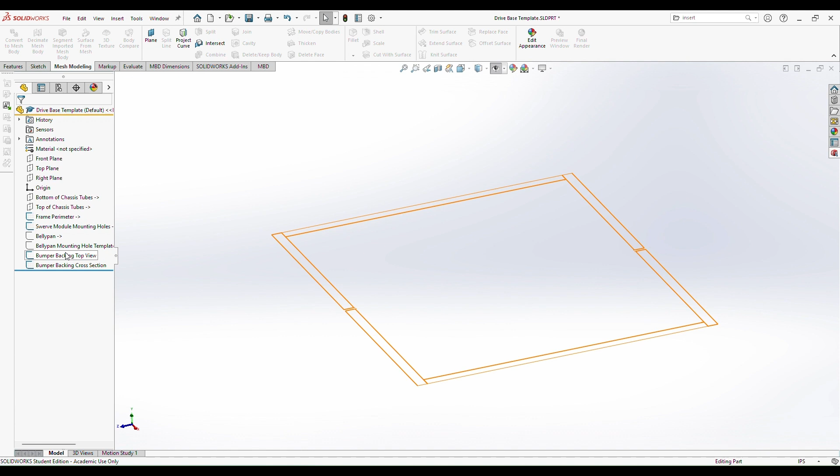We have some visibility, there we go. Instead of doing the top view, we're actually going to do the front view first, or the cross section. So we go right plane and make a sketch.

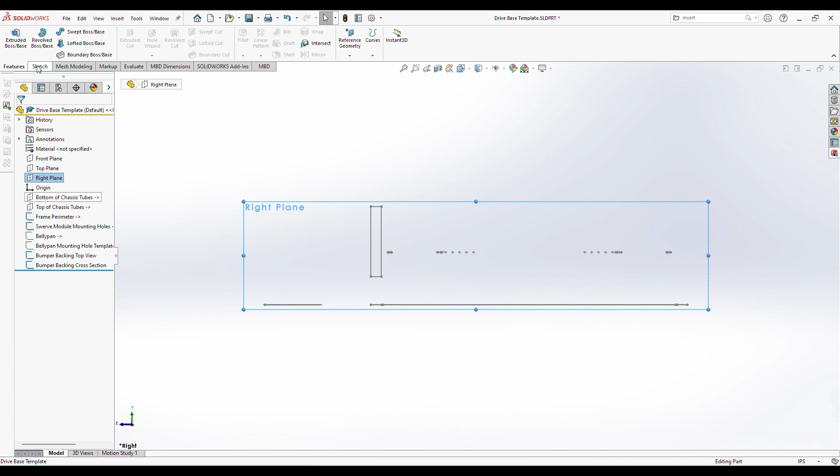The beginning of the soft parts is going to be our pool noodles. So we've got two circles to represent that. We're going to make these equal in size, tangent to each other, and vertical above each other. So now this moves around. We also know that the pool noodles are about 2.5 inches in diameter, but again, that's a parameter we can tune.

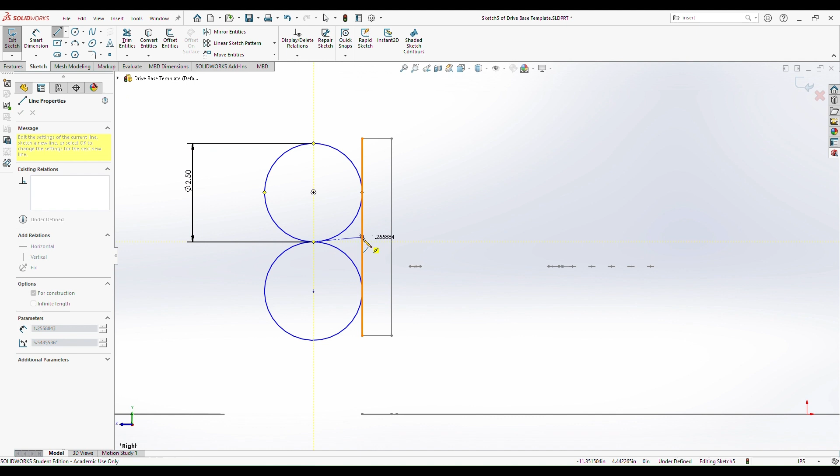So now we need to stick these to this bumper backing. Tangent that there, and we want to get it about even with the center line. We'll go from this midpoint here to this point here and just make that horizontal. So that'll put us in the right place.

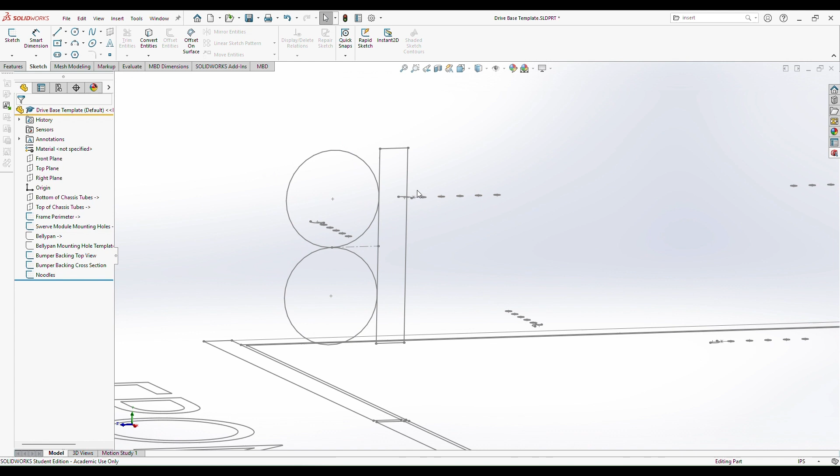All right, so that's our noodles. Just call that noodles. And we could extrude that. You could either go in and make it a solid, or extrude it all the way around this way. But that's kind of a pain to do because you have to copy the sketch like 3 or 4 times in order to do that.

So I'm going to skip the noodles because we can't see them anyway. Instead, I'm going to do the fabric that goes around the outside. And we'll start with just

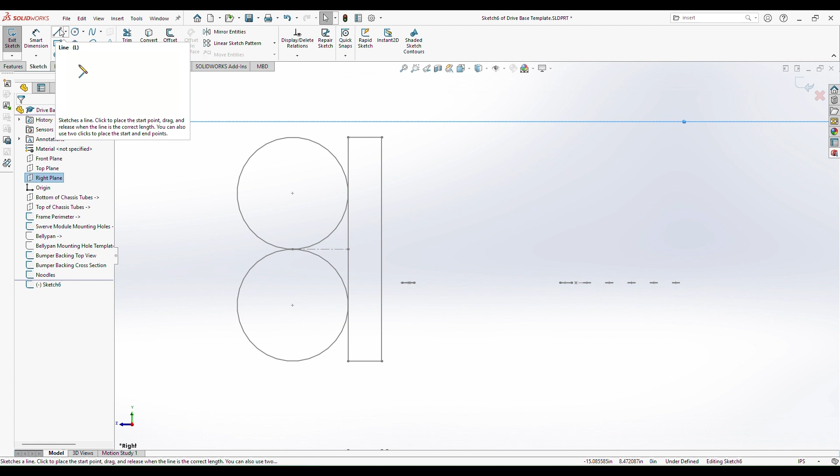A sketch on the right plane where we bring in - actually we don't need to bring this in. We'll bring in these, we'll convert entities, and then we can connect this to here, this to here, this to here. And again, I'm going over the plywood because we're going to make this the fabric.

The fabric's going to extend over the plywood. We could have a gap in the back, but I'm not going to model that right now. I'm just going to model it as though it's contiguous.

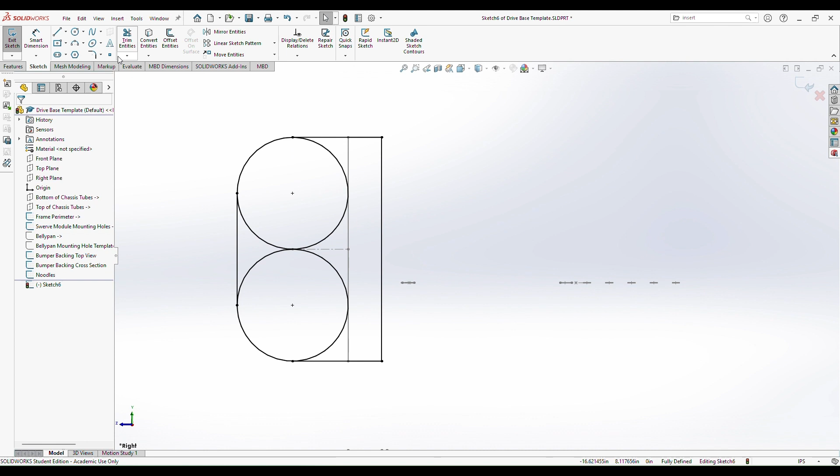And this is one of the very few times when I will say it is good to use the trim tool. We converted this from another sketch, so there's no way that we're going to break the geometry when we do this, because it knows where it's from.

Cut this, cut this. So I'm using the power trim, so when you drag a line through something - let me undo and we'll show that again.

So trim entities: you drag a line, and when you cross over another line, it trims it to its 2 nearest neighbors, so it trimmed it to here and there. Same thing again, I'll trim this one. And again, nothing happens to the geometry because this is coming from that noodle sketch.

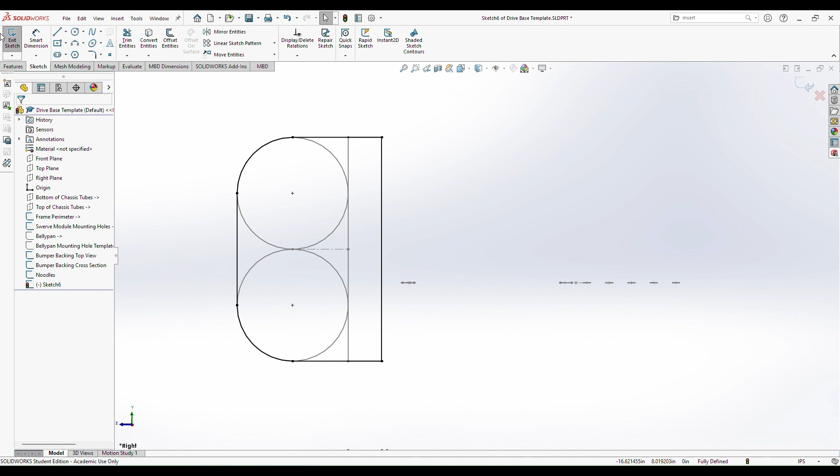Anyway, so that's what we got here. Let's call this the fabric.

And we could leave it there. Let me edit this, show you this. You could leave it there, but we can also do an offset just to show what the fabric actually looks like.

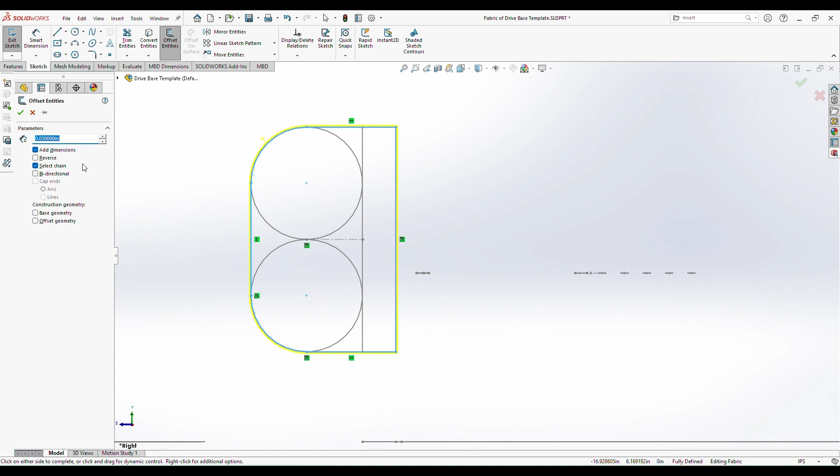So I'm going to do this, 30 thousandths of an inch - 0.03 is about what that fabric measures, I believe. So now we can see it in there. All right, so this is going to be the fabric cross section, but we need to make a fabric top view now.

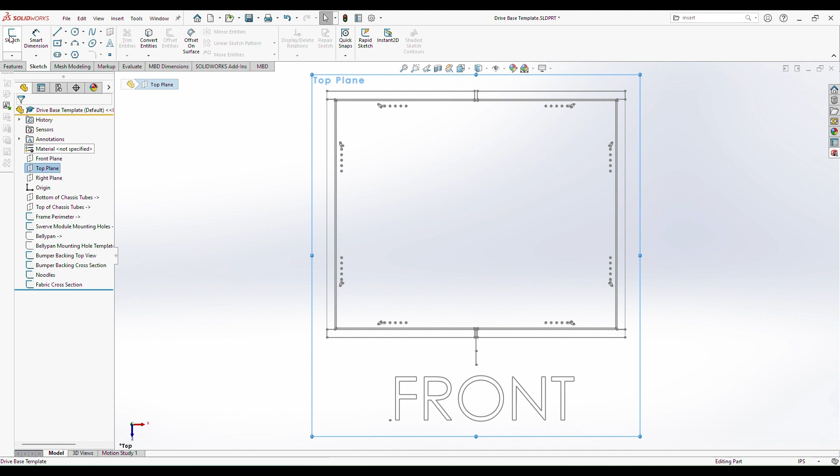So we'll go on the top plane, we'll make a sketch. And we're actually going to make it the same way as we had before, just that sort of inverted. So we'll go around on the outside here.

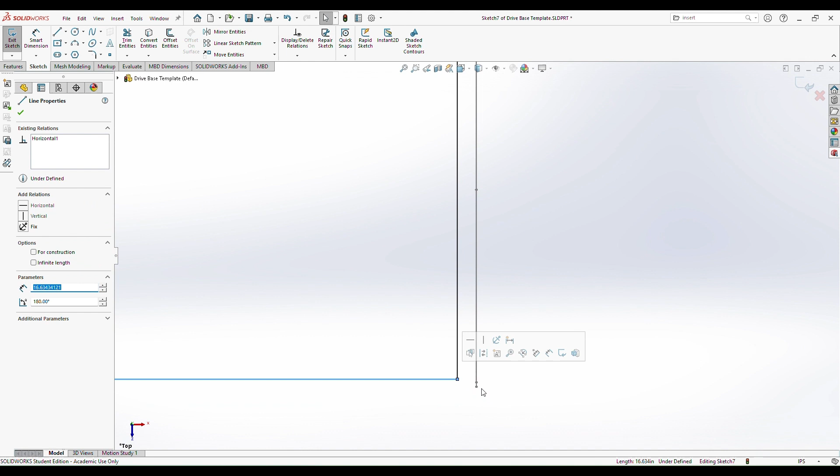We're not going to bother with that 30 thou offset just yet. This line here and this line here. Oh, probably be this point here. Nope. This line here and this point here.

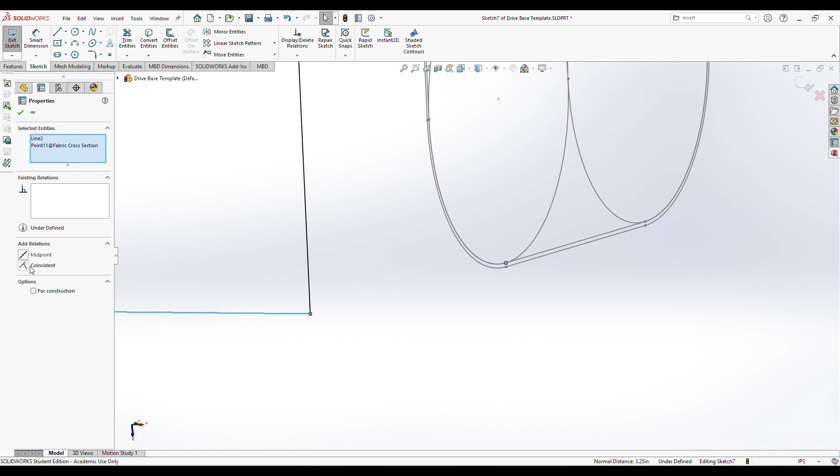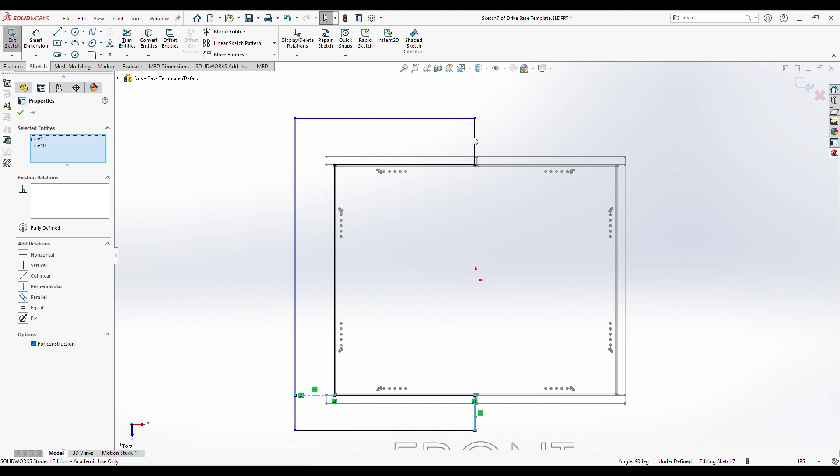There we go, make that coincident. So that sets our distance out. And for the rest of these, we can just center line across here. We got this line is equal to this line is equal to this line. Equal - that makes half of the bumper. So I'm going to do the same thing on the other side.

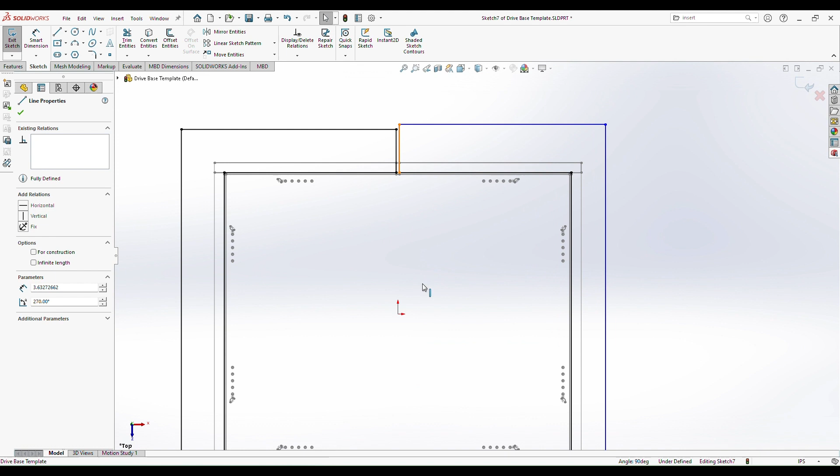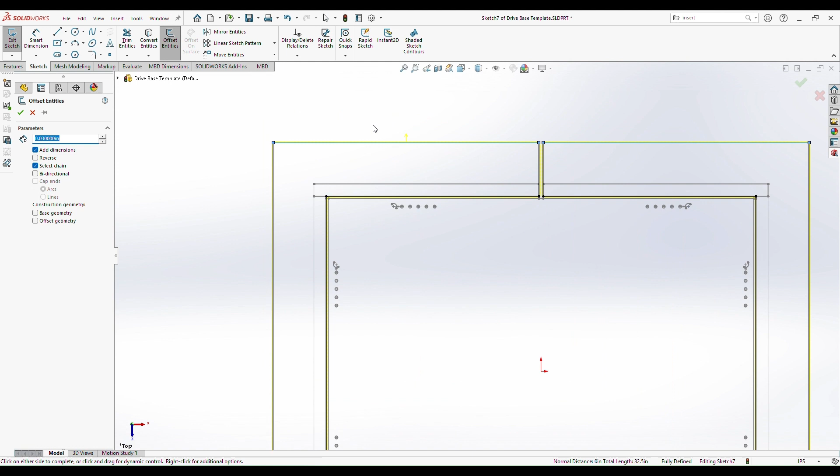And then just for kicks so we can see it, I'm going to offset this. You can see we're offsetting this outward, but I'm going to make that construction geometry. The offset geometry will be construction.

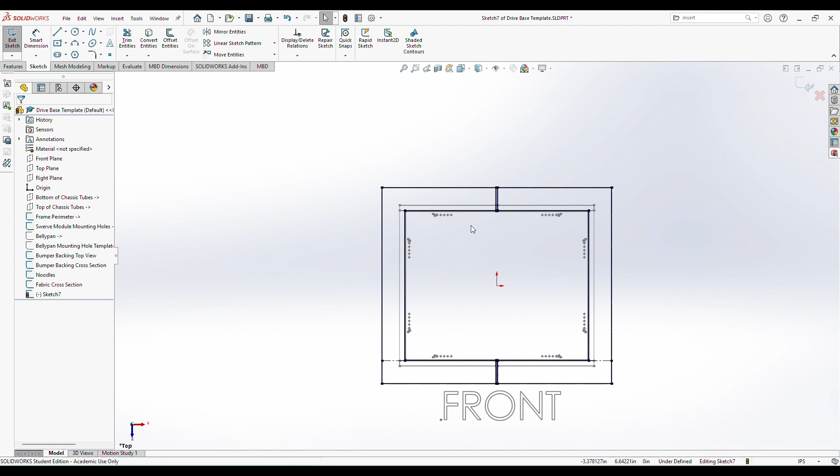So you'll note that this won't update with the other thing, but if we delete this dimension here, now you can move these. You can set them to any size you want. And then if you do that, you can pick this up and make that coincident so it'll update with this other sketch.

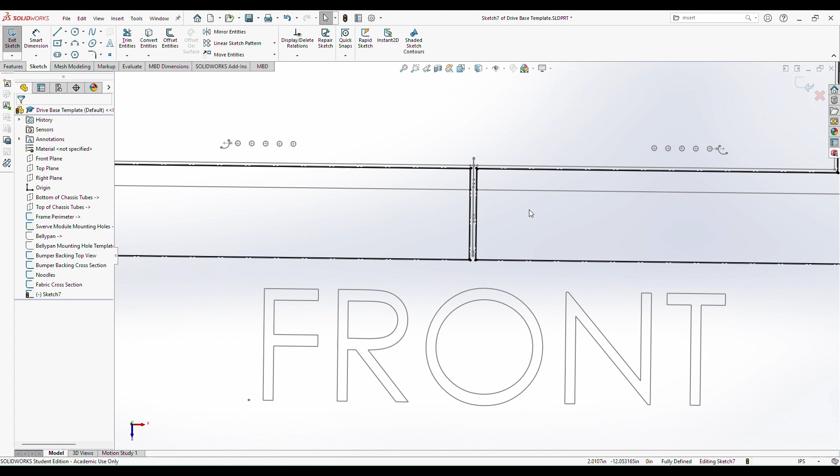So that's our sort of bumper elevation here. Or not bumper elevation, bumper top view. Bumper fabric top view.

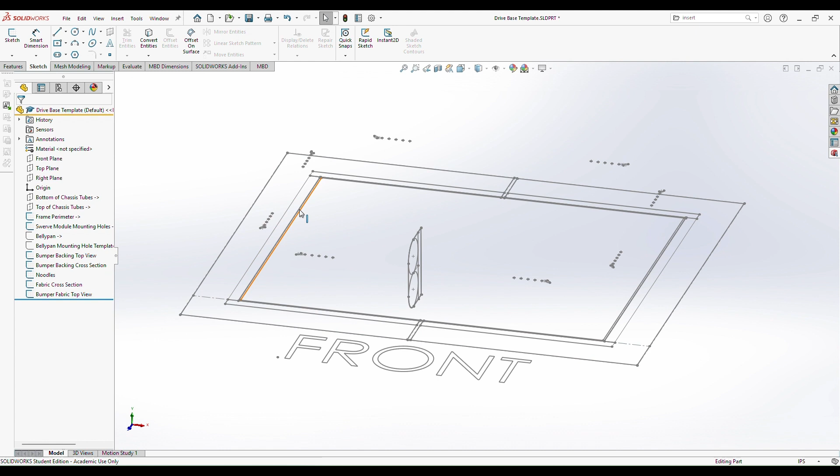And just like the bumper backing, we're going to extrude it. It's only going to be 2 pieces instead of the 6 of the bumper backing because we don't care about separating these out.

So let's do it. We'll make a new file, new part. In the new part, we will insert our template part again. We need to make sure unabsorbed sketches and planes are in there. We probably don't even need planes. Of our sketches, these 2 are the important ones.

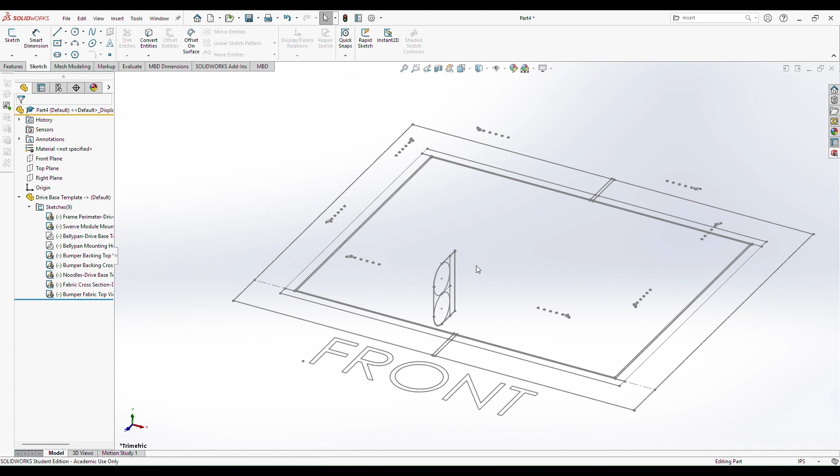So we're going to start with this one, and we're going to extrude. The same way that we did before, we'll pick this as our starting vertex down here, and we will pick up to vertex, and we'll pick this one. I picked the inner ones for both of these, and you'll see why in a bit.

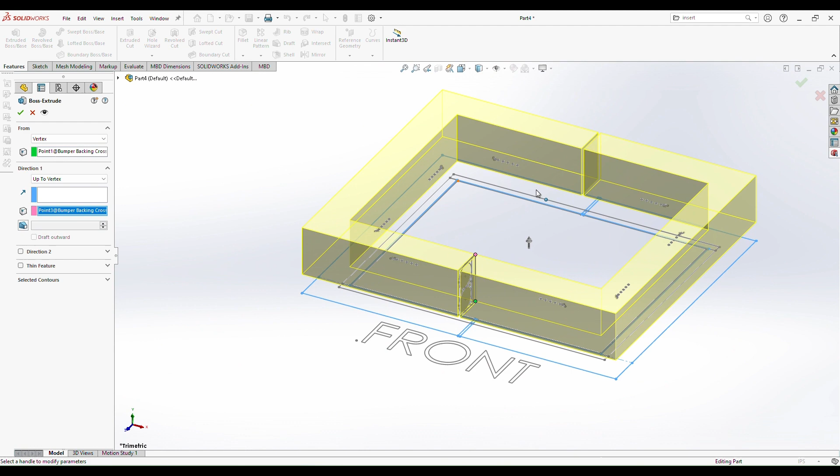So we got it. It's going to give us 2 bodies, 1 body, 2 body. And that's good. So our next step on this is we want to fillet these.

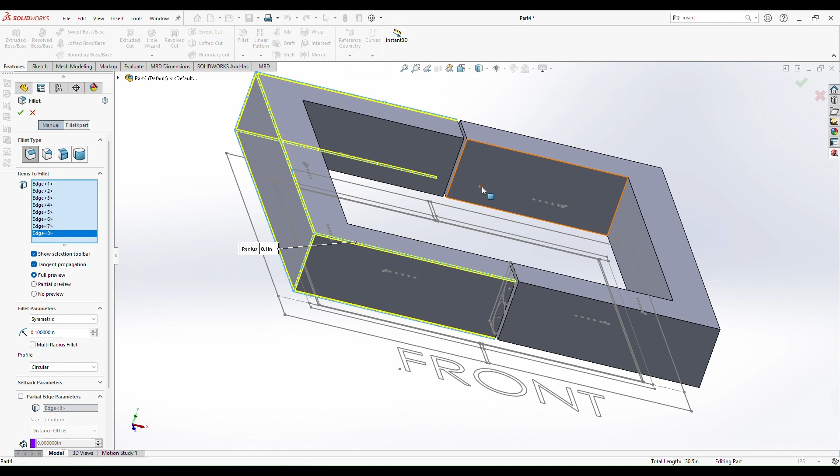So we'll come around and hit each of these edges. You can fillet right through a face if it knows what you're looking for. Oop, missed one. See? Right there. Oh yeah, it's only going to let us fillet 1 body at a time.

That makes sense. And for our radius, it's going to be half of what the bumpers were. There are ways to link this, I'm not going to get into that right this second. 1.25.

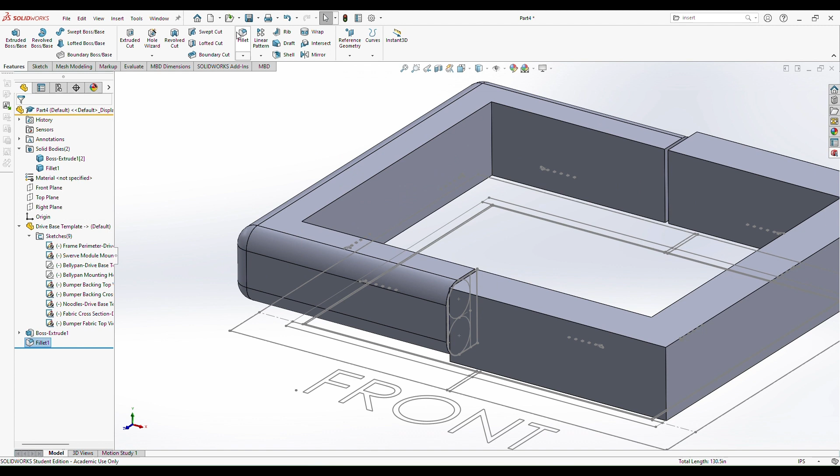We will do a second fillet feature where we will hit all of the radii, all the outer radii on this other body.

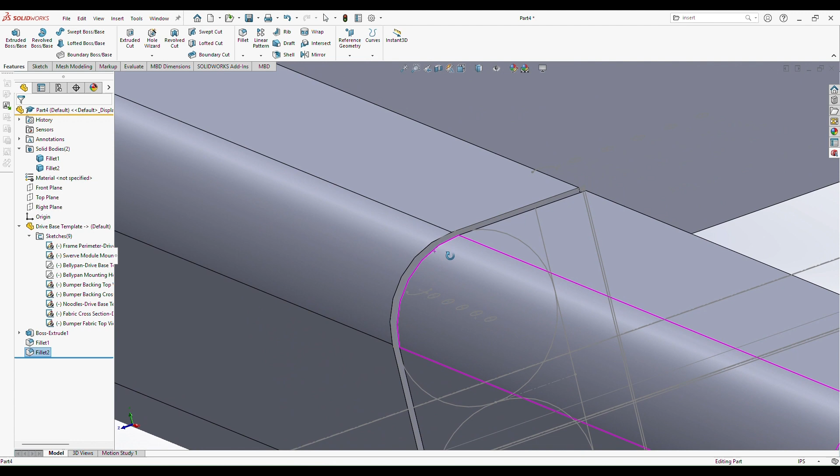Okay, so this is not the size of the fabric, right? Because we added that additional 0.03 inches. But that's where we can do something really clever.

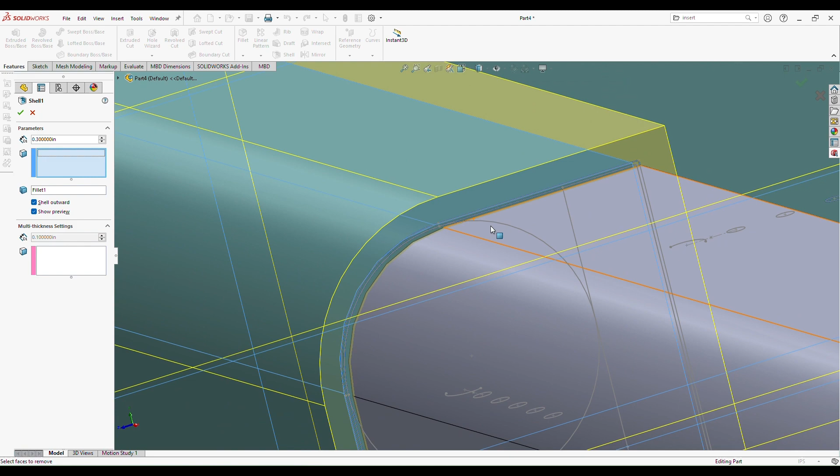Click on one of these bodies and click shell. And we're going to shell this outward by 0.03 inches. You'll see, let me exaggerate this for a moment. We go to 0.3 - that it sort of bulks up the entire part. If you look at the side view, you'll see that it's getting bigger. If you go down to 0.03 like it's supposed to be, there you go.

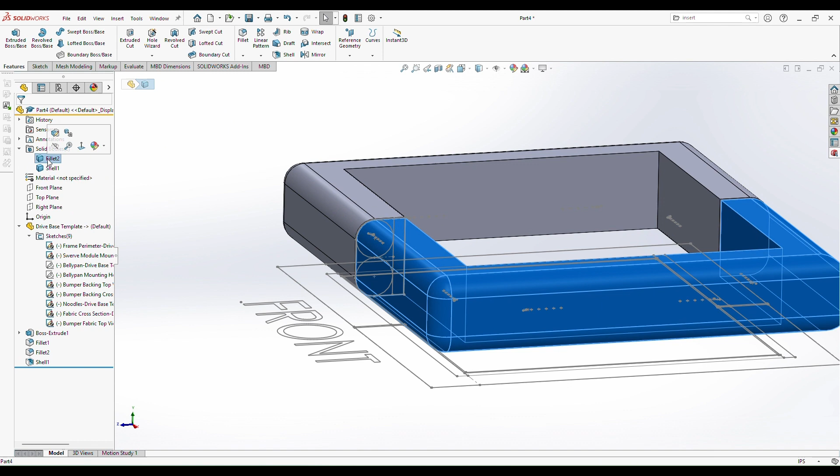And we will do the same thing on this other one. We will shell that part outward, 0.03, show preview. Looks right.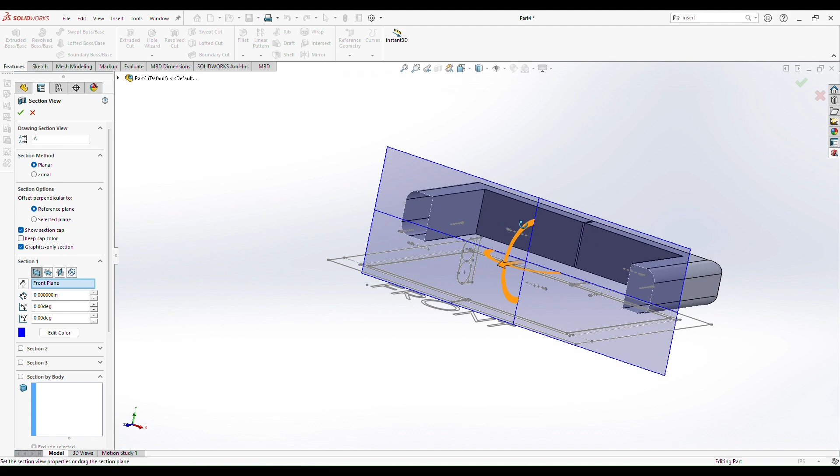The other thing about this is if you do a section view, you'll see that this is actually hollow. So if I go to the front plane, for instance, and I do a section view - that's this button up here - you can see inside. So it is just that 0.03 inch thick shell.

Now we've got our bumper, sort of our bumper soft part perimeter. We can save this. Bumper soft parts.

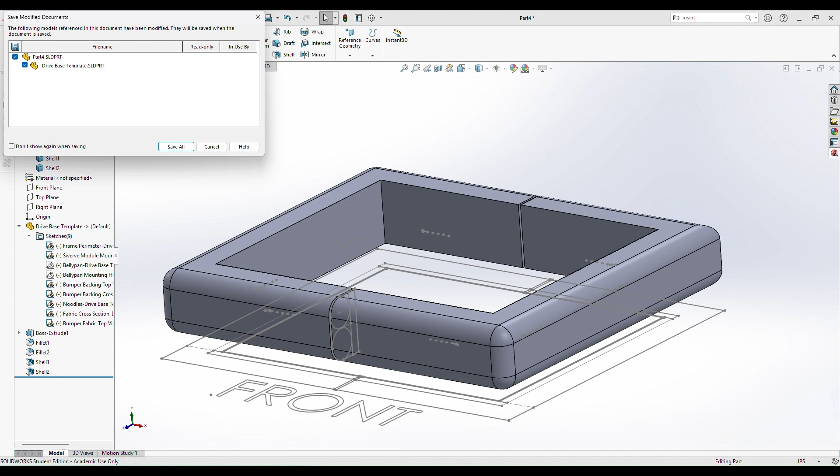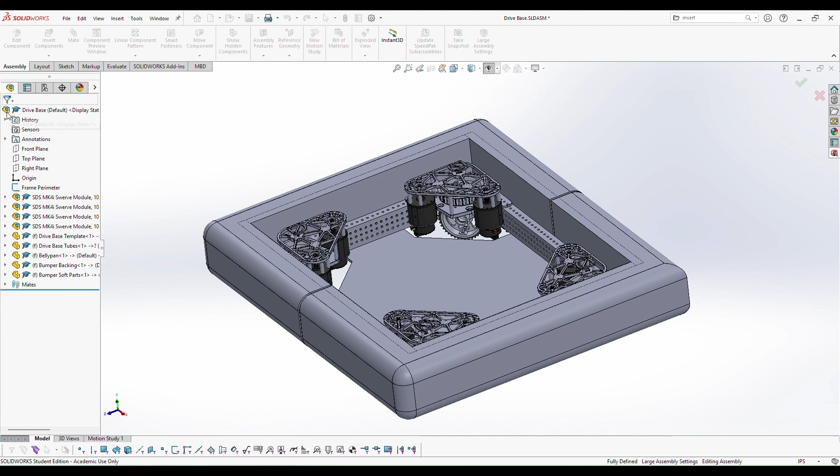And we can go into the drive base, just like before. Insert bumper soft parts. There we go. Just regular shaded.

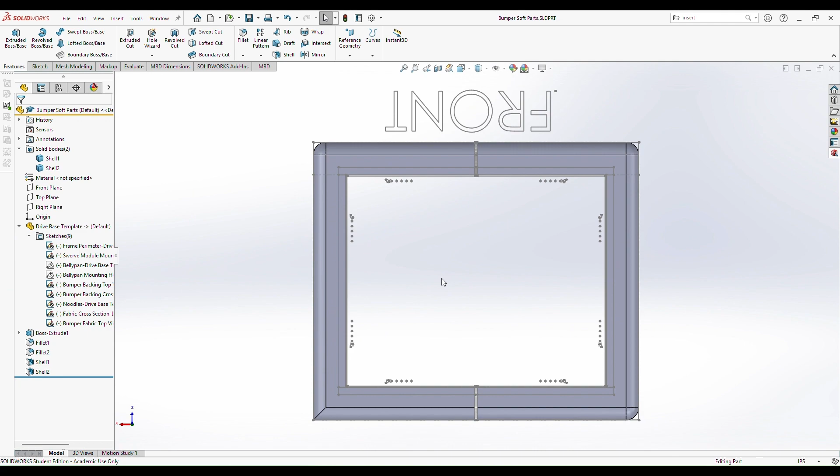And there you go. And if you go back into bumper soft parts, one of the things that's interesting to note is that just like on actual bumpers, you add thickness to the side of the bumper as well. So that's why it's important to make this gap not close all the way up. So we add thickness there, we add thickness to the back here, so we start to fill this gap between the frame perimeter and the bumpers.

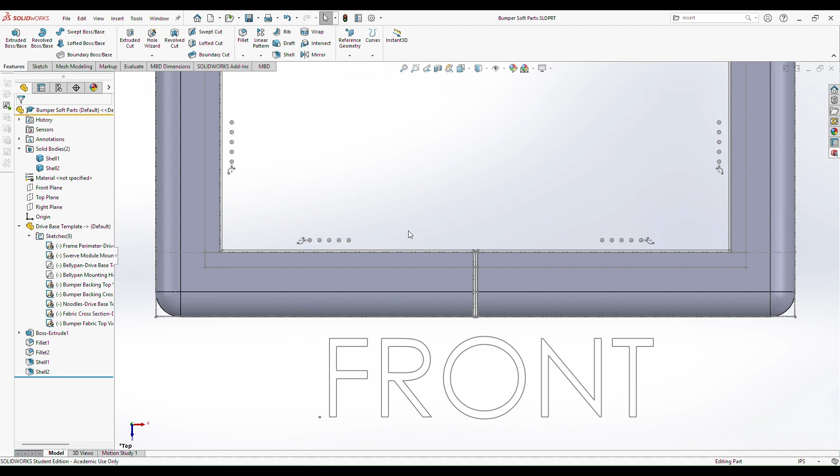And we add thickness to the outside too. And so if, again, we had an intake that was depending on there being a very specific thickness here, we would have modeled that. So there we go.